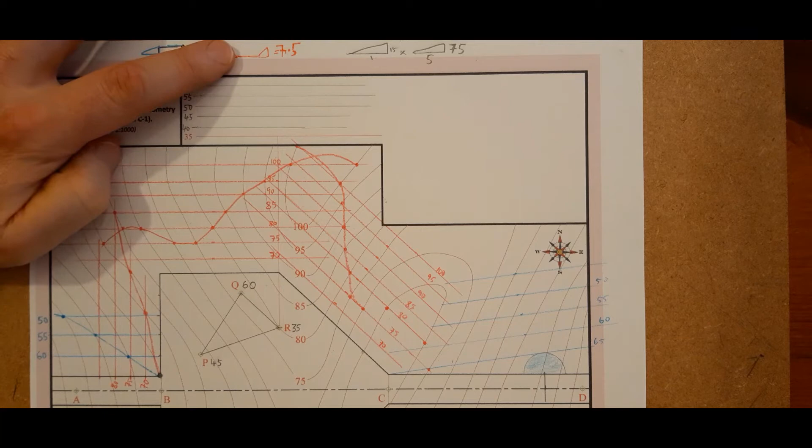Hi folks, 2018 question C1 here, and what we're looking at is a toll plaza, and we've got a plan view there of the way the ground widens out to accommodate that. Now we're given certain pieces of information in that the embankments are 1:2, the cuts are 1:1.5, and when you scale them up, of course, that means the embankments are filled, becomes 10 millimeter spacings of the lines, and the cuts will be 7.5. We're told from C to D over here that the road is rising, so it's level all the way at 65, and then it's rising from C to D, and it's 1:15.

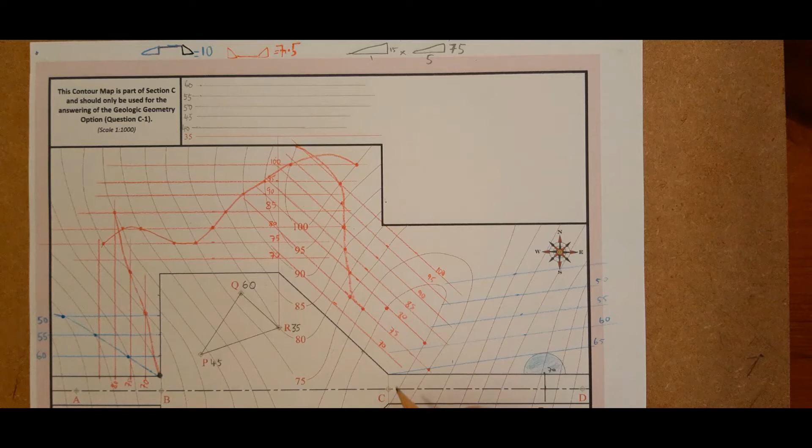So when you scale that up, if you come down 75 mil along the road, which I have already done here, it'll go up 5 meters in altitude. So this guy will be 70. At that point there, it'll be 70 as well. This guy will be 65 down here. Now, the next thing you ask yourself is cut or fill. So remember the saying, cut at the butt, fill at the hill.

And I've done out all the very basic parts of the road where it was level, okay, because that's relatively simple stuff. So down here then you ask yourself, cut or fill. Well, actually you've got both going on, and I've just partially set up this just to save some time on the video. So you can see the way when it starts at 65 there, it's too high, okay, and somewhere around here it gets too low. So we're going to actually have to put in cut and fill on this little section, which is quite unusual, and it might be a bit messy, but we'll get it done anyways.

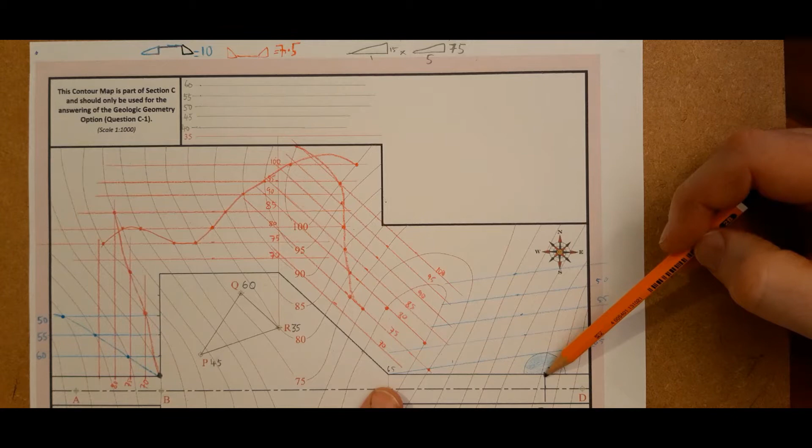So I'm going to worry about the fill part first, so I have that bit set up. So set your compass to radius 10, draw in your semicircle here. Why? Because fill at the hill, okay? So we'll just worry about this piece first of all, and then we'll worry about the cut, okay? So I marked it off. Remember, it's always getting lower, 65, 60, 55, 50. And we'll go ahead then and we'll start marking out our points there.

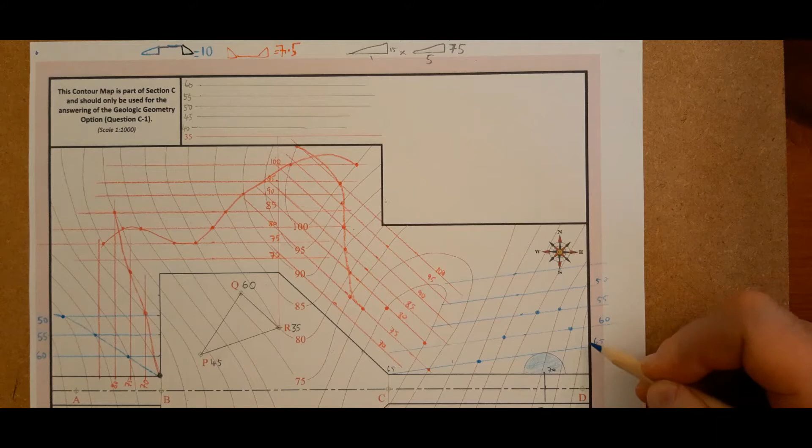Now, they might overlap. Sometimes you might need another point. If you do, we can just drop that down there. That will get us 70. So just drawing that line, not too heavy for the time being. And now part of this is cut. Okay, it's too high. So cut at the butt, this is the lower point, that's the higher point. So set your compass to 7.5, I've already done that there. Press down your compass and we'll draw our little plan view of our semicone. And I'll just shade that in there.

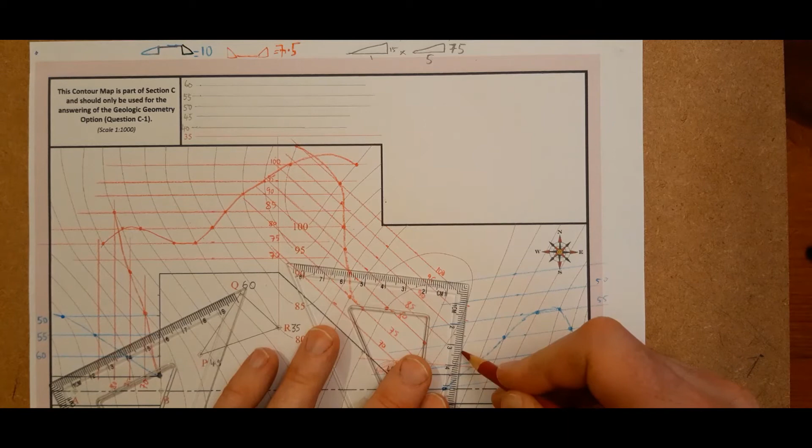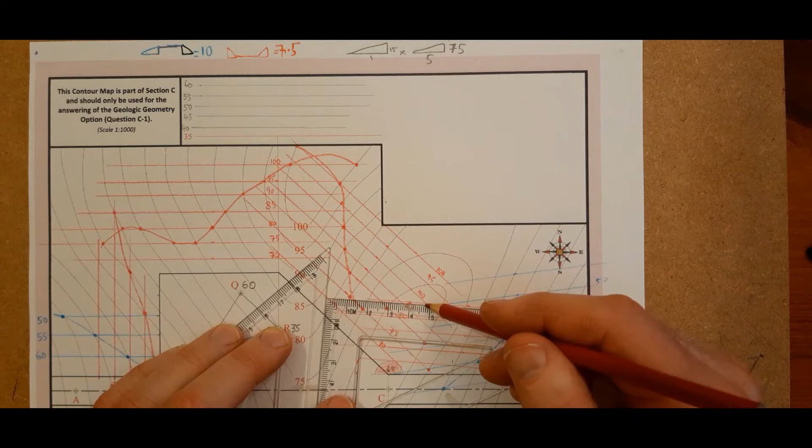And now from over here, we'll run off our tapered line and we'll space these guys out at 7.5 mil intervals. And what we'll be looking for, of course, is a place where they crisscross. Let's run on those lines a bit extra. So we're looking for the crisscross, this red line we already have, and this blue line. Now, so that one there is 70. 75, 80, 85. And I don't think we need to go any higher than that, okay?

So let's just start off. Actually, I just had to finish out this guy from earlier on. So we're looking to cross that existing red line now and this blue line. So 70 will give me a point here. 75 will give me another point here. Here. 80 there. So I find out that's already where that guy crisscrosses there. Okay, so that's a very important point.

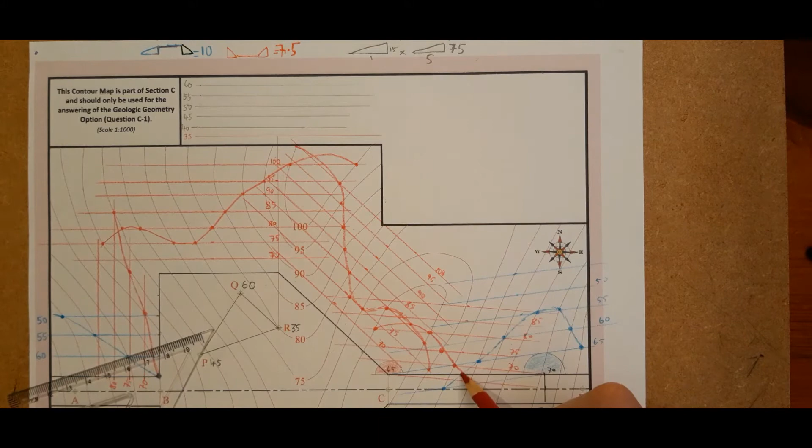And then if we go the other way, we just need to drop this down. That'll give me a point. That guy, that's 65, of course, coming from here. So now we've got the point there where the two crisscross here and here. So we'll just go then and we'll put in our symbols. And that is the drawn part of the question. So just remember that, cut at the butt, fill at the hill, and you'll be grand.

Now, if we just go back to the question here, and I'll roll down, it's telling us part B: on a map, P, Q, and R are 3 points on the surface of the Earth. So there they are there. I already went ahead and just joined them in. Vertical boreholes at these 3 points reveal a triangle on the top surface of a stratum of ore at altitudes of 45, 60, and 35. So I always just write them in.

There's no harm either, I think. And then it's saying, in the space provided at the top of the map, draw the elevation of the triangular portion of the top surface of the stratum. Okay, so they already kind of had a start for you there with the altitude lines. So I just came along earlier on and did a few more of them. So you only need to go up as far as 60. That would be our max height.

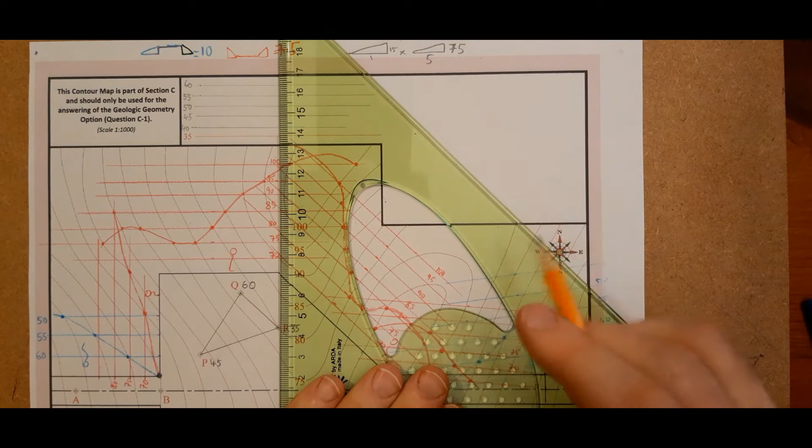Okay, so this is getting us R here. It's at 35. Q is at 60. And we have P here at 45. And we'll join them in then.

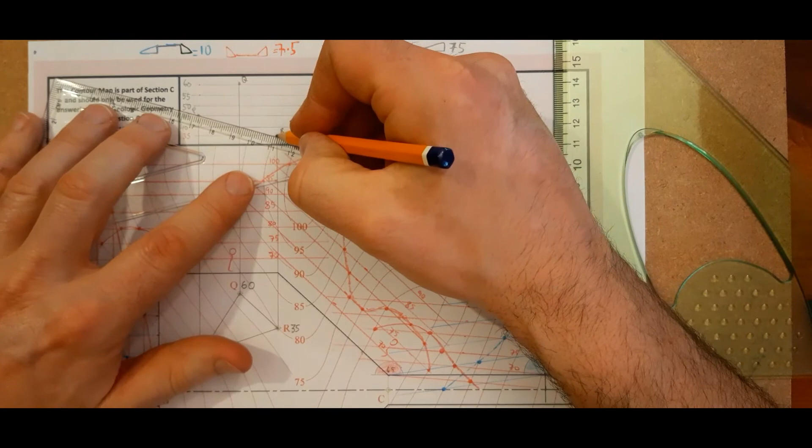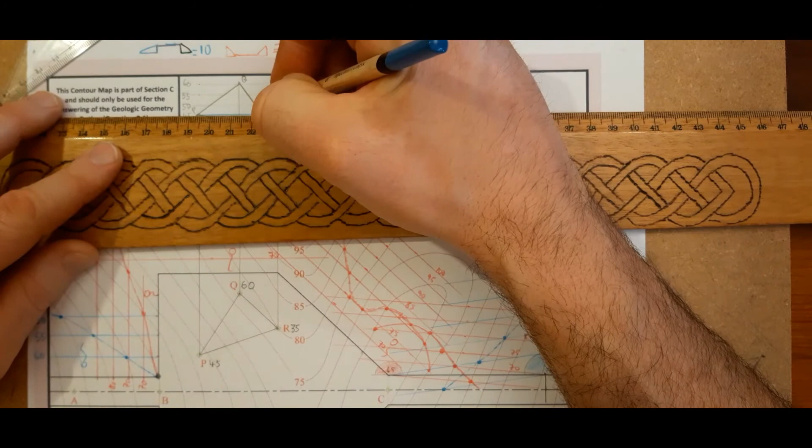Now the reason we need that as well is the next part we've been asked to do is to get the strike and dip, okay? So we're going to need to see an edge view of that to see the dip, but we have to find the strike line first. So what we always do is we take a level line across there. We'll drop them down onto the line QR, which will be here. You drop it down. And this will get us our strike line. So I just put an S there for strike.

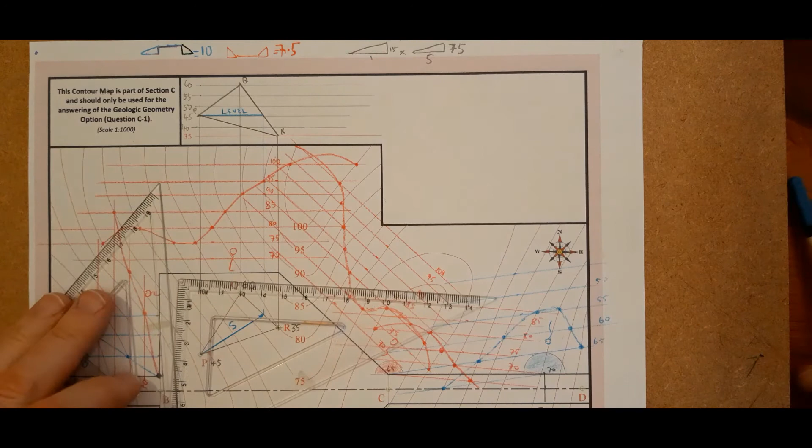Now, another handy thing about that is that it is a true length line. And if you want to see a plane as an edge view, you need a true length line and look along it, and you'll see it as an edge view. And that way we'll find the dip as well. So get your set squares there. Line them up. Actually, I'll just get the bigger set square.

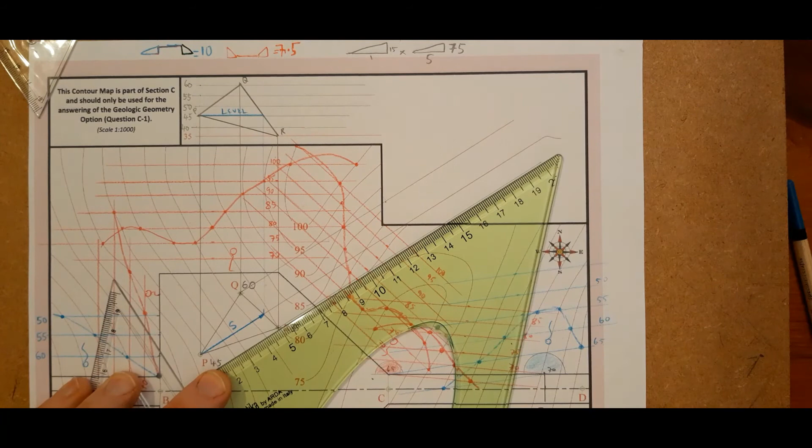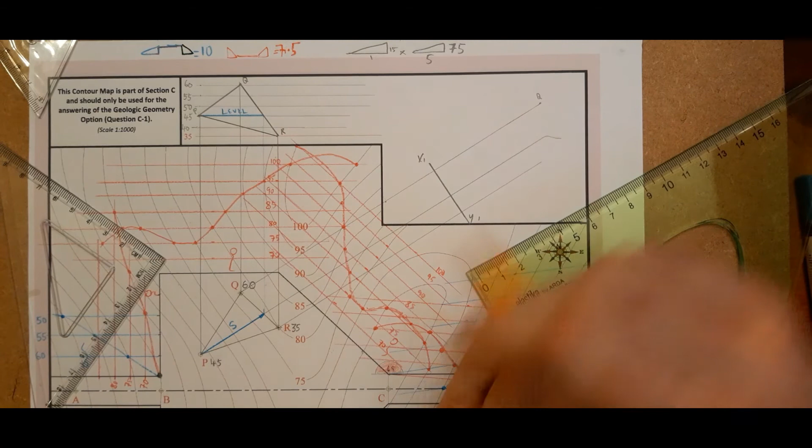Set in our x1, y1. Now Q with a height of 60. So we can mark that off there. R, the height of 35. If we just join them in there, this will get us P here. So that there is the dip. That angle there. I'll just put a D in there for dip. Now, that's the last part done.

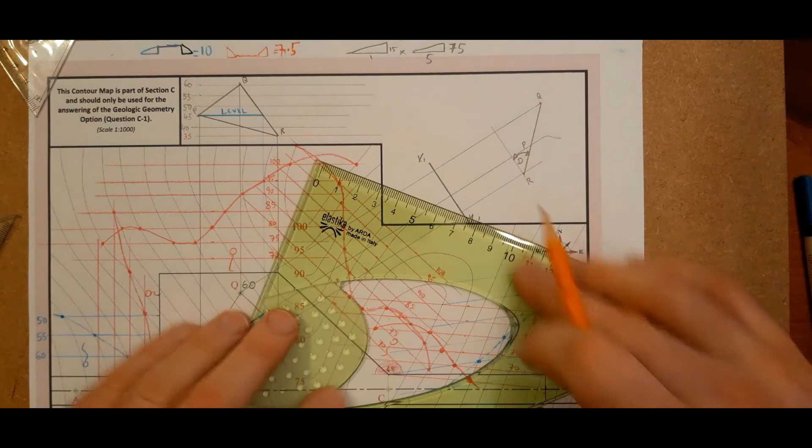Just to go back before part C, there's a third part to part B. Determine and indicate in meters the length of the shortest skew borehole from R to the top surface of the stratum. Okay, R has a height of 80 there. We can see it sitting on that contour line. Okay, so if we measure up 80, that will be the top up there. Now that's where we got that point, when it drilled down. That's where we got that height of 35 from.

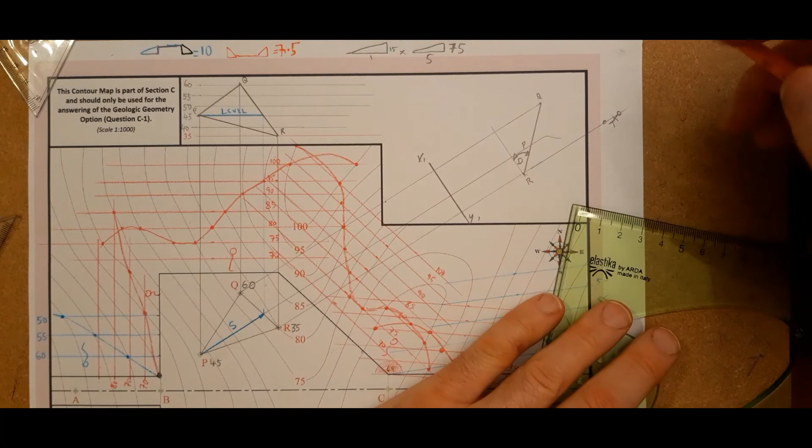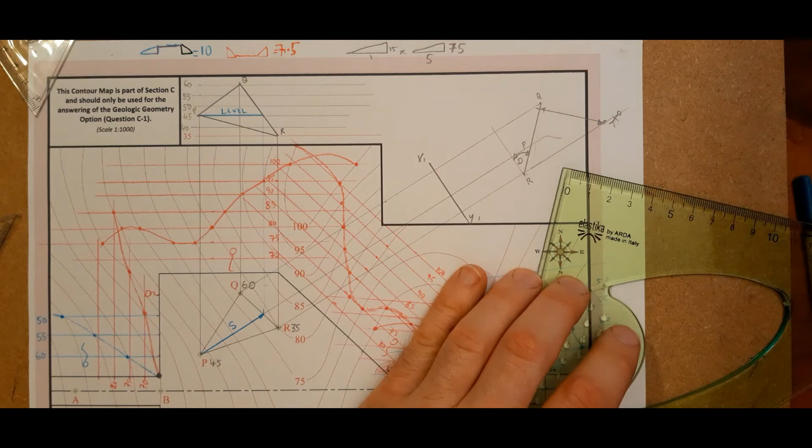But if you were standing up here, drilling down, that is the height you would be above when you hit the top surface. So the shortest distance, you could pick any point along here, and even the surface can extend on. That's just a portion of the surface. But the shortest distance, of course, would be at a right angle to it. Okay, so that is the shortest distance there. And you can throw a measurement on it if you want, just in case. I think it said indicate in meters. So I make it 32 there, or just mark distance down there at the very least. So that's that part.

Now the last part we're coming up to is C, and it says determine and plan the line of intersection between the top surface of the stratum and the surface of the widened portion of the car park. So when they drilled down there initially, they found this top surface of the stratum of ore. Now we know the car park was made at a height of 65. Now that is just a portion of a stratum. So it could extend on downwards for God knows how long, and it could also go upwards.

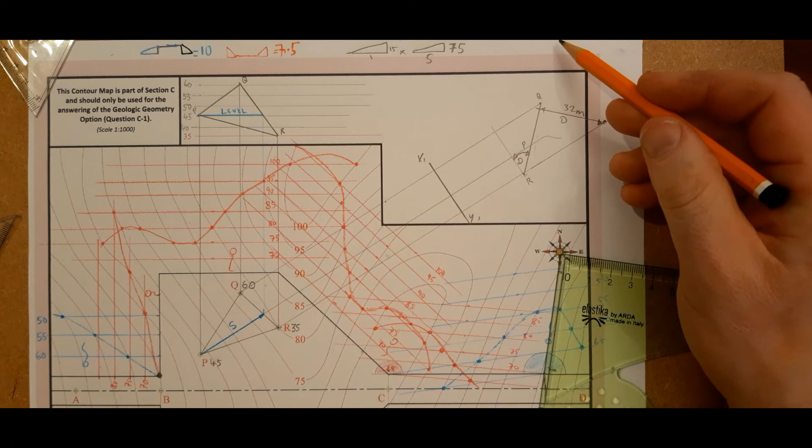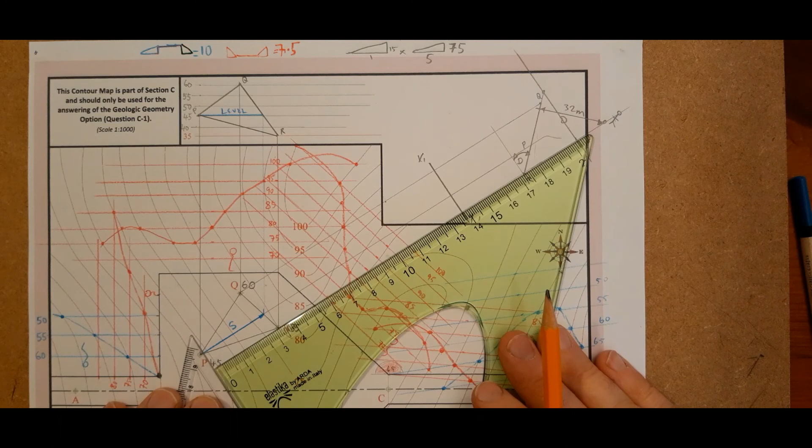So if it did go upwards and the car park was finished, the car park is at an altitude of 65. And it's level ground. So the car park would be going along like that there. If you were to extend up, then this ore could have come up and could have hit the car park at that point there. And if you were to represent that back in your plan view there, we'll do it like so. Just run this guy back down. And that is how it will be represented in plan view.

Okay, so that's that question finished, folks.